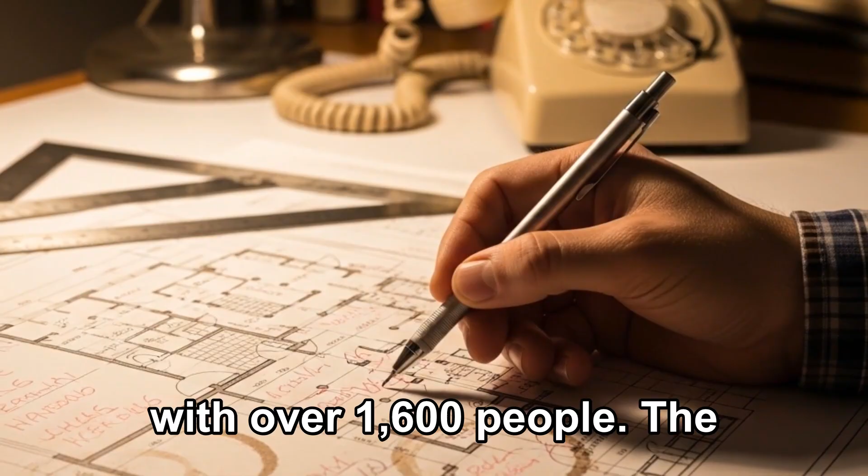It began as a night of pure, unadulterated glamour, a shimmering testament to the economic boom of the early 1980s and the architectural prowess of Kansas City. Imagine the scene. It is July 17, 1981, and the lobby of the brand new Hyatt Regency hotel is filled with over 1,600 people. The air is thick with the scent of expensive perfume and the upbeat rhythm of a swing band. People are dressed in their finest attire for the tea dance, a weekly tradition that had quickly become the hottest ticket in town.

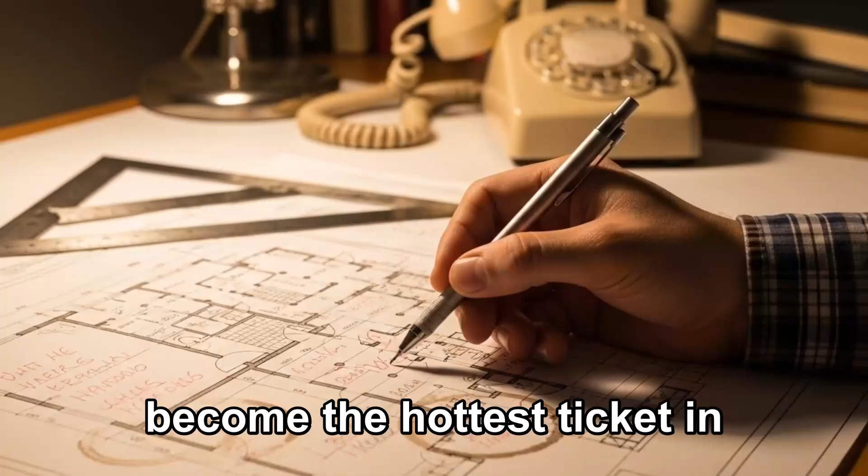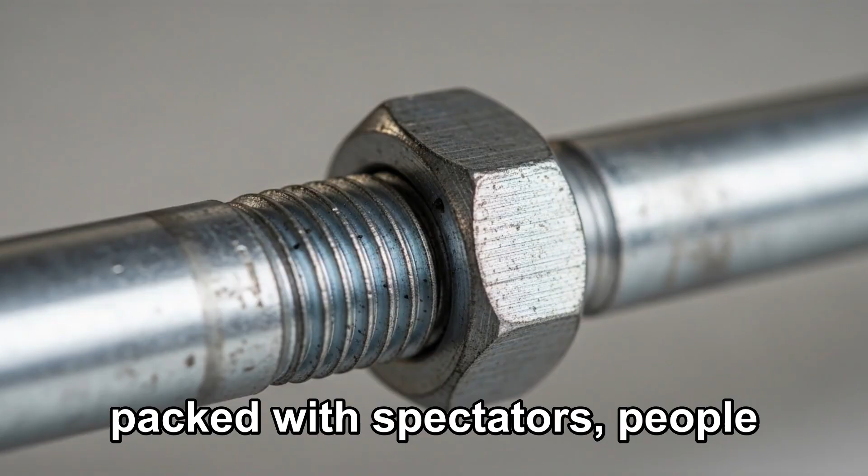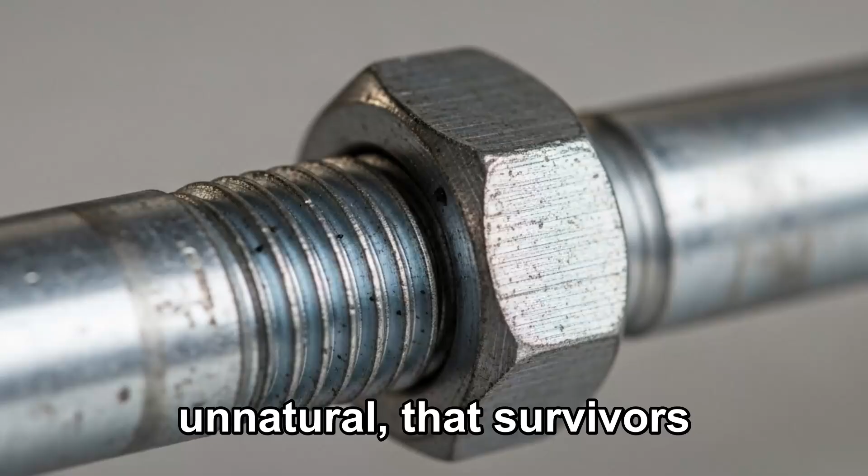Above the crowded floor, three massive, multi-ton walkways made of steel, glass and concrete are suspended from the ceiling like elegant ribbons of modern engineering. They are packed with spectators, people leaning over the railings to wave at friends below, their laughter blending with the music. Then, at exactly 7:05 p.m., the music is severed by a sound so violent, so unnatural, that survivors later described it as a literal explosion or a shotgun blast amplified 1,000 times.

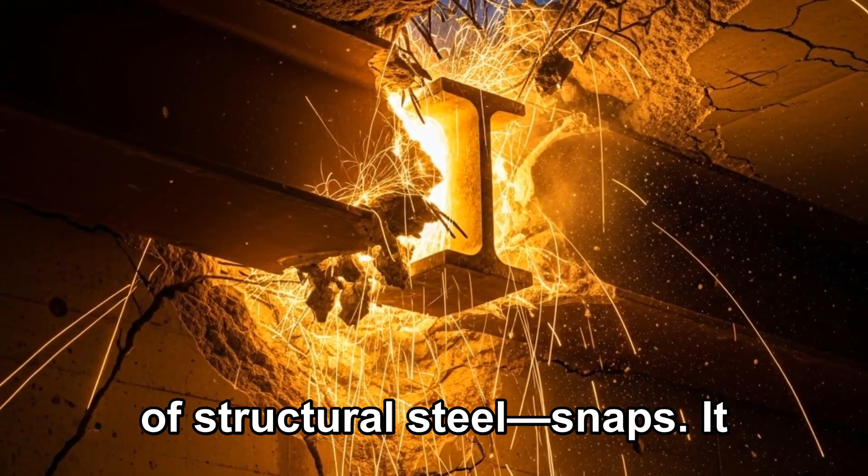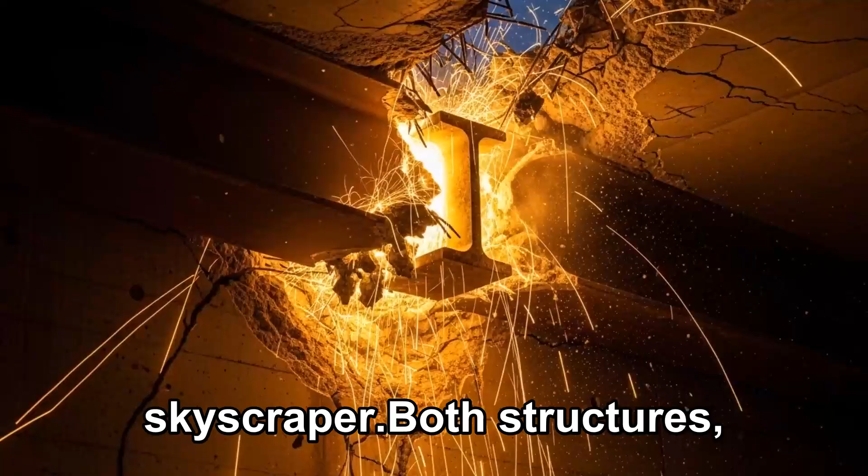In an instant, the fourth-floor walkway, a 64,000-pound behemoth of structural steel, snaps. It doesn't just sag, it shears. It plunges downward, slamming into the second-floor walkway directly beneath it with the force of a falling skyscraper. Both structures, now a combined mass of nearly 130,000 pounds of pulverized concrete and twisted metal, scream through the air and vanish into a cloud of white dust as they flatten the lobby floor. There is a heartbeat of total, suffocating silence before the screaming starts.

In the middle of this video, we are going to reveal a single, 3-minute decision made by a contractor on a busy afternoon that turned these walkways into a death trap. A mistake so deceptively simple that it is still taught in every engineering university on the planet as the ultimate warning of how a lack of communication can kill.

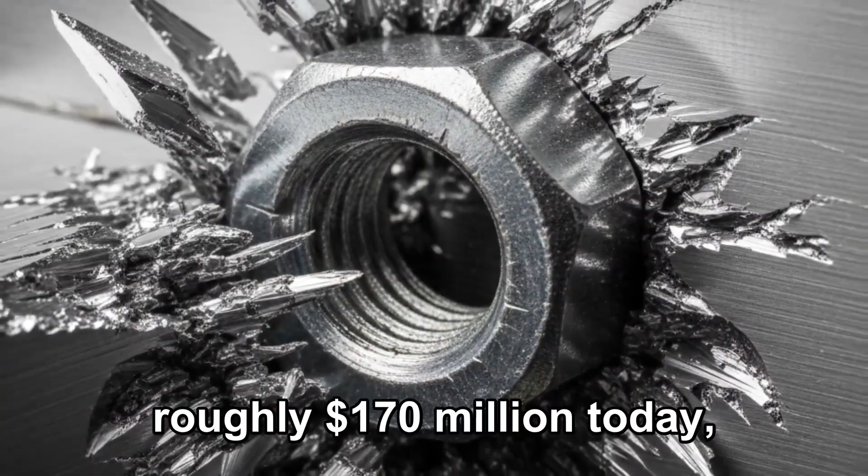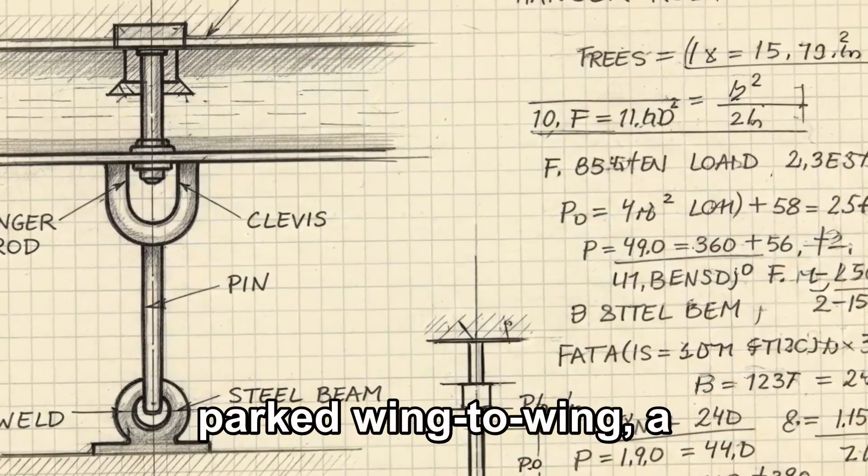The Hyatt Regency was not just another hotel, it was a $50 million crown jewel, a mega project intended to revitalize the urban core of Missouri. To put that into perspective, $50 million in 1981 would be roughly $170 million today, the equivalent of building a luxury stadium or a high-tech hospital wing. At the center of this ambition was the atrium, a vast, sun-drenched cathedral of glass that rose 40 stories into the sky. This wasn't just a room, it was a statement of human dominance over space. The atrium was wide enough to fit several Boeing 747s parked wing to wing, a cavernous void that demanded a unique solution for guest movement.

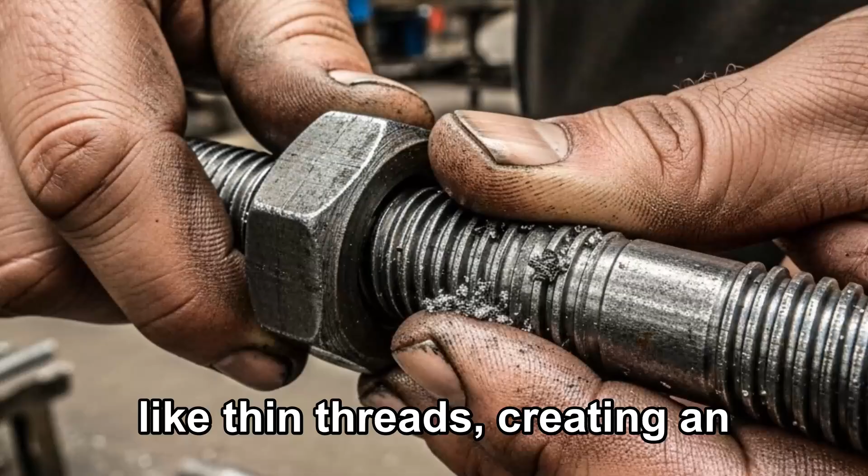The architects designed a series of 3 skywalks, the second, third and fourth floor walkways. These were 120-foot-long spans of architectural brilliance floating in mid-air. To give you a sense of the scale, each walkway was as long as 3 city buses parked end-to-end and weighed as much as 25 full-sized SUVs. They were suspended from the ceiling by a series of 1.25-inch diameter steel hanger rods. To the naked eye, these rods looked like thin threads, creating an illusion of weightlessness that was the talk of the architectural world. It looked impossible, yet it was certified by the most prestigious firms in the country.

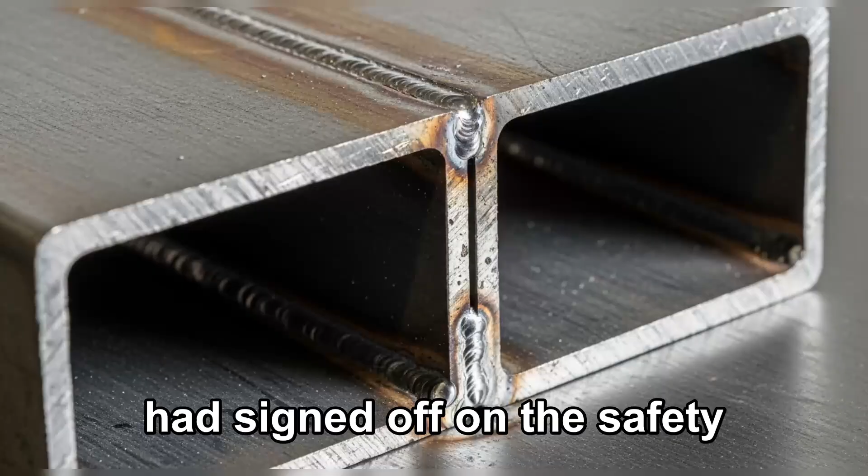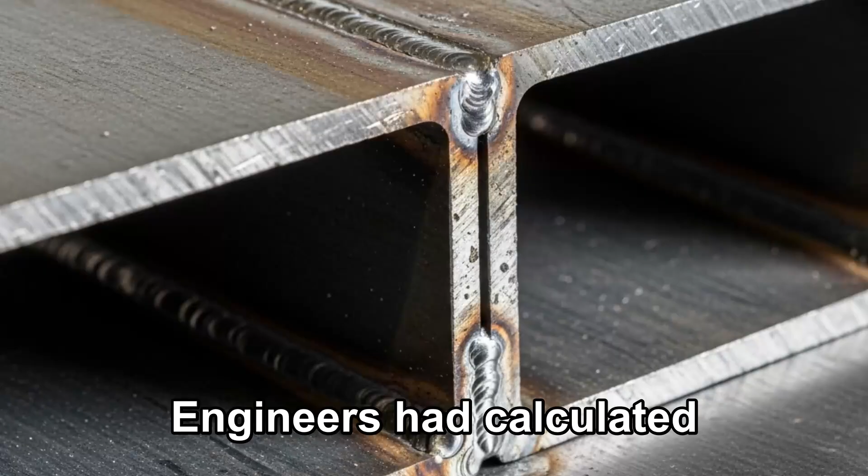Every single bolt, every weld and every structural plate had been inspected. This was a project by Gillum & Associates, a firm known for its rigorous standards and technical precision. The blueprints had been reviewed, the city inspectors had signed off on the safety protocols, and the construction had followed the letter of the law. It was legal, it was modern, and it was supposedly over-engineered. The load-bearing structures were designed to handle not just the dead weight of the concrete, but a massive live load of pedestrians. Engineers had calculated the safety factor to be well within the margins of international building codes. There was no reason to doubt the integrity of the Hyatt. It was the safest place in the city.

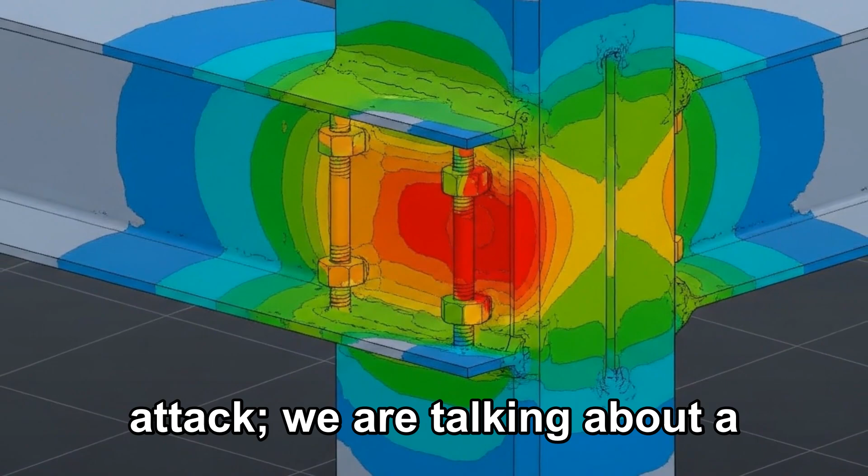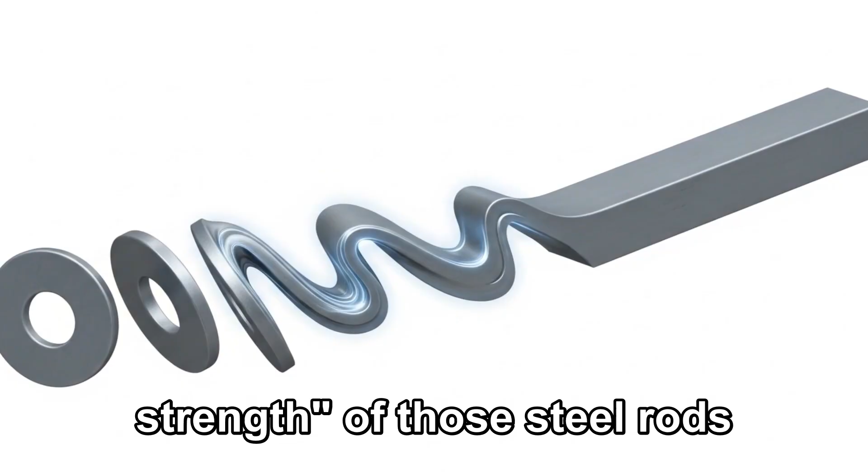Until the very laws of physics were challenged by a design flaw hidden in plain sight. We aren't talking about a natural disaster or a terrorist attack. We are talking about a failure of basic geometry that occurred while everyone was looking at the beautiful pink marble and the soaring glass ceilings. The assumption was that if it looks strong and the experts say it's strong, it must be safe. But on this night, the yield strength of those steel rods was being pushed to a breaking point that no one had actually calculated for the final build. The most terrifying part of this story isn't that the building was weak, it's that it was built exactly how the revised plans said it should be, and those plans were a death sentence signed in ink.

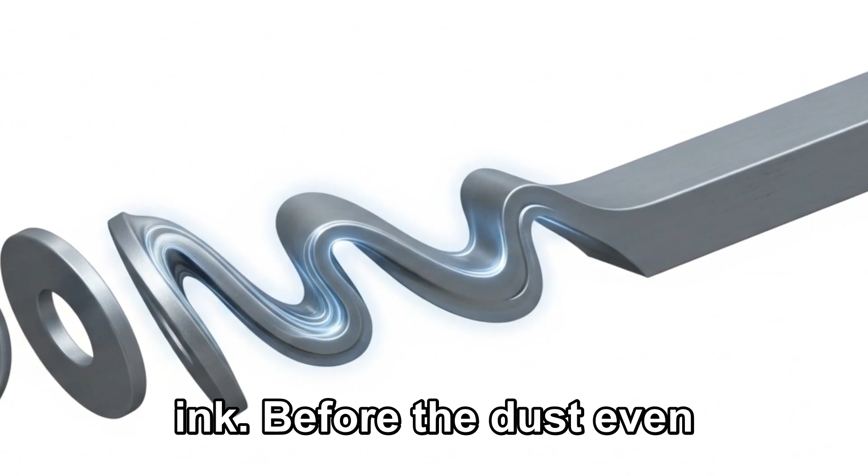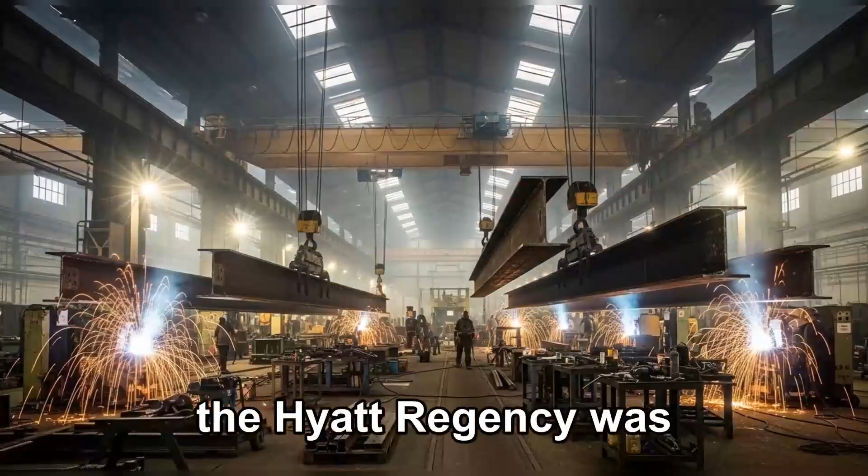Before the dust even settled in that lobby, the question wasn't just how did it fall, but how did we let this happen? To understand why 114 people had to die, we have to look past the velvet curtains and the jazz music, deep into the skeletal structure of the hotel. The catastrophe of the Hyatt Regency was not born on a Friday night in July. It was born in a series of frantic phone calls and skipped calculations 2 years earlier.

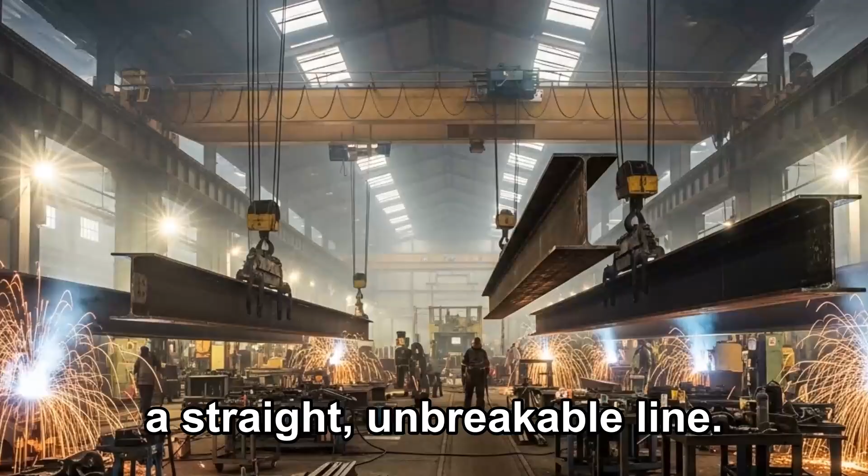At the heart of this failure is a concept engineers call the load path, the specific route that the weight of a structure takes as it travels down to the ground. In a perfect world, this path is a straight, unbreakable line, but at the Hyatt, that path was twisted into a deadly knot.

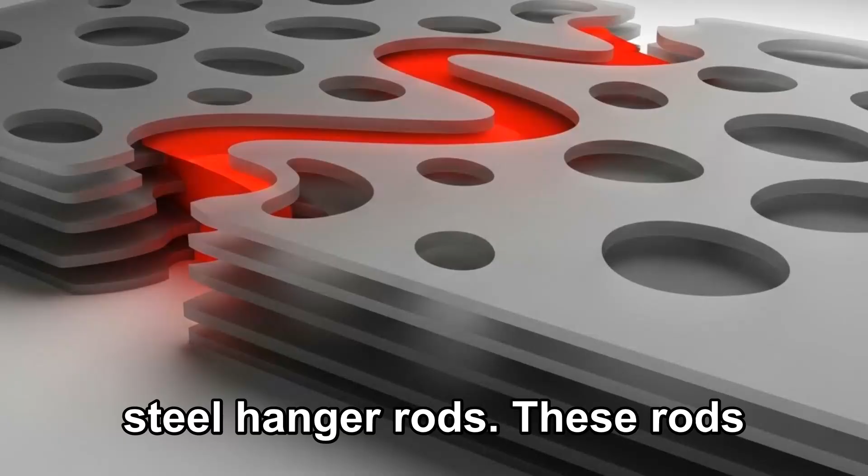The original blueprints, drafted by the esteemed firm Jack D. Gillum and Associates, called for a series of continuous 45-foot-long steel hanger rods. These rods were supposed to run from the heavy structural steel in the ceiling straight through the 4th floor walkway and continue all the way down to support the 2nd floor walkway. In this original configuration, each walkway was independent. The nuts supporting the 4th floor only had to carry the weight of the 4th floor. The nuts supporting the 2nd floor only carried the 2nd floor. It was simple, elegant, and theoretically sound.

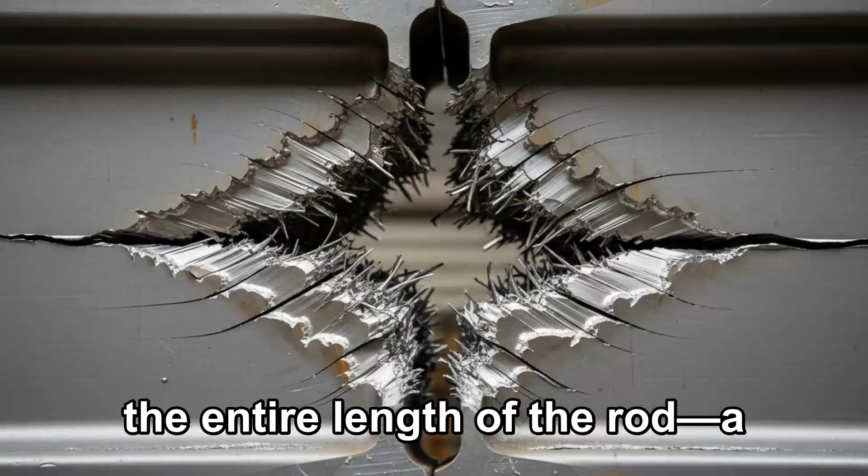However, theory often crashes into the reality of the construction site. The steel fabricator, Havens Steel Company, looked at those 45-foot rods and saw a logistical nightmare. To install them, they would have to thread the entire length of the rod, a process that is not only time-consuming but risks damaging the integrity of the steel. In a fateful, 3-minute decision that was never properly documented or calculated, the design was changed.

Instead of one long rod, they decided to use 2 sets of shorter rods. The first set connected the ceiling to the 4th floor walkway. The second set connected the 4th floor walkway to the 2nd floor walkway. To the untrained eye, it looked identical, but in the world of physics, this change was cataclysmic. By shifting to a double rod system, the engineers unknowingly doubled the load on the connection points of the 4th floor walkway. Now, the nuts and the steel box beams of the 4th floor weren't just holding up their own level, they were acting as a bridge for the entire weight of the 2nd floor hanging below them.

Think of it like this. Imagine 2 people hanging from a rope attached to a ceiling. In the original design, both people are holding onto the rope itself. The rope feels the weight of both, but each person's grip only has to support their own body weight. In the revised Hyatt design, the top person is holding the rope, but the second person is hanging onto the first person's ankles. Now the top person's grip, the connection at the 4th floor, must support the weight of both people.

The load capacity of the connection was stretched to its absolute limit before a single person even stepped onto the glass. The yield strength of the steel, the point at which metal stops acting like a solid and starts behaving like plastic, deforming permanently, was being challenged by the very air it occupied. The technical term for what happened next is shear failure. The box beams supporting the walkways were made by welding 2 C-shaped steel channels together. The hanger rods passed through the middle of these beams. Because of the design change, the nut and washer on the 4th floor were being pulled through the bottom of the steel beam with twice the force they were designed for.

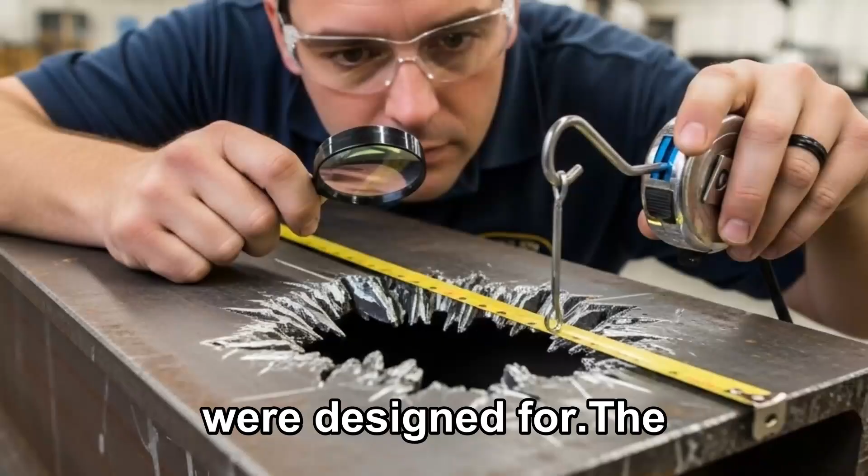The most haunting part is that there were warning signs. During the construction in 1979, a large section of the atrium roof actually collapsed. This should have been a black box moment, a signal to stop and reevaluate every structural calculation in the building. The engineers at Gillum & Associates claimed they did exactly that. They assured the owners that they had reviewed the entire structure, including the walkways. But the math for the double rod change was never actually done. They looked at the sketches, assumed the wind load and seismic load margins were sufficient, and moved on. They ignored the angle of inclination and the sheer torsional stress that the weight of a crowd would eventually apply.

There was no safety factor left. In engineering, you typically want a safety factor of at least 2 or 3, meaning the structure can hold 2 to 3 times its expected maximum load. At the Hyatt, because of that one change, the safety factor had dropped to approximately 0.6. The walkways were failing the moment they were finished. They were simply waiting for the right vibration to trigger the end. They were not just a walkway, they were a 130,000-pound guillotine held up by a prayer and a lack of oversight.

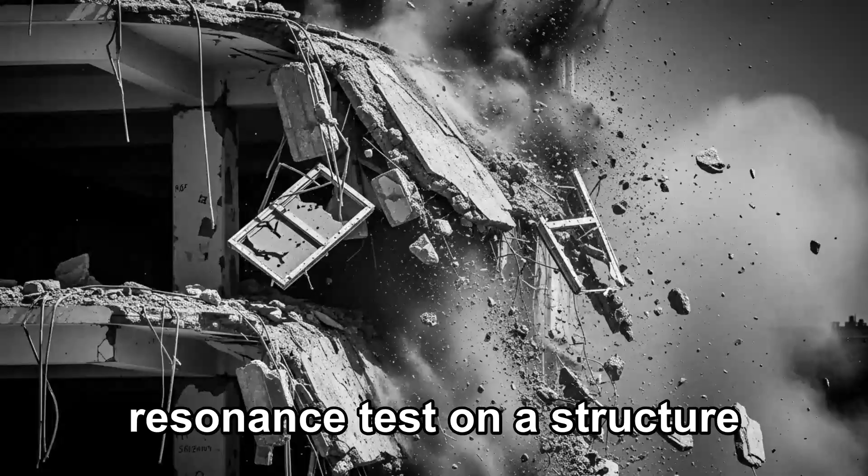As the tea dance began and hundreds of people began to sway in rhythm with the band, they were unknowingly performing a harmonic resonance test on a structure that was already in a state of terminal fatigue. The physics were set, the decisions were final. The point of no return had been passed long before the first bolt snapped. The clock on the wall of the Hyatt Regency lobby froze at 7:05 p.m.

For those standing on the second-floor walkway, the first sign of the end wasn't a visual cue, but a sensation, a sudden, sickening drop as if the very air had lost its buoyancy. Eyewitnesses described a sound that mimicked a massive explosion, followed by the high-pitched pinging of steel bolts snapping like glass beads. In a span of just 7 seconds, the fourth-floor walkway split at its central connection points. The steel box beams didn't just bend, they unraveled. The nuts holding the rods literally punched through the bottom of the beams, creating jagged holes in the metal.

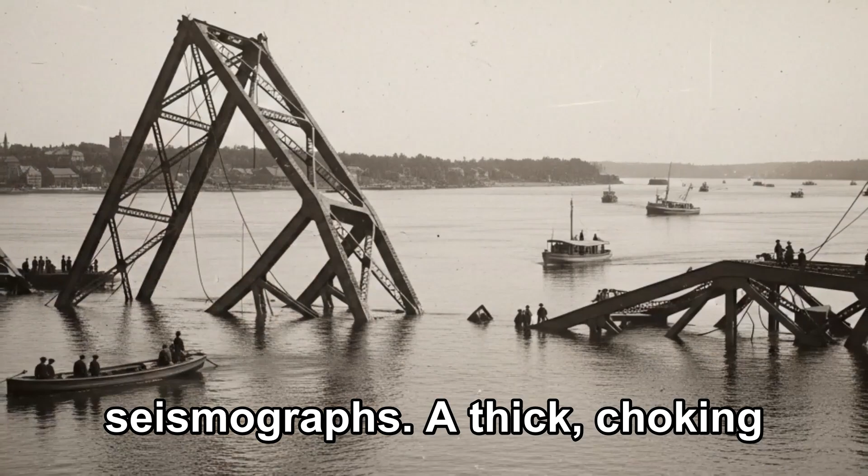As the fourth-floor span began its vertical descent, it acted like a massive piston, slamming into the second-floor walkway directly beneath it. The momentum was unstoppable. Approximately 65 tons of concrete, steel, and human beings accelerated toward the lobby floor. The impact was so violent it registered on local seismographs. A thick, choking cloud of pulverized concrete dust instantly blinded everyone in the atrium, turning the bright, festive tea dance into a dark, suffocating hellscape.

When the dust began to settle, the scene was unrecognizable. Where there had been a soaring architectural marvel, there was now a jagged pile of rubble 20 feet high. The rupture of the hotel's main water lines added a terrifying new dimension to the catastrophe. Millions of gallons of water began to flood the lobby, threatening to drown the survivors who were pinned beneath the massive concrete slabs. Rescuers arrived to find a scene described by many as a war zone. Firefighters and ordinary citizens used car jacks, sledgehammers, and even their bare hands to claw at the debris.

One of the most haunting stories is that of Mark Williams, a young man who spent hours trapped in the freezing water, holding the hand of a stranger who eventually went cold. Or the story of the band who were playing the final notes of a swing classic when the sky fell on them. The human cost was staggering. 114 people were killed instantly or died of their injuries, and 216 others were left with life-altering scars, both physical and psychological. This was not just a list of statistics, these were families, local leaders and children who had come for a night of joy and found themselves in the middle of the deadliest structural collapse in United States history until the fall of the Twin Towers.

The immediate response from authorities was a mix of shock and clinical precision. Within hours, the National Bureau of Standards (NBS) had cordoned off the site. They didn't just want to clean up, they wanted to find the black box of this building. Lead investigator Edward Pfrang began the painstaking process of analyzing the wreckage. The investigators discovered something chilling. The walkways were so poorly designed that they were barely supporting their own weight. The data logs showed that on the night of the collapse, the walkways were carrying only about 10% of the maximum live load they were supposed to handle. This meant the failure wasn't caused by the crowd being too heavy or people dancing too hard. It was a failure that was destined to happen eventually, even if the building was empty.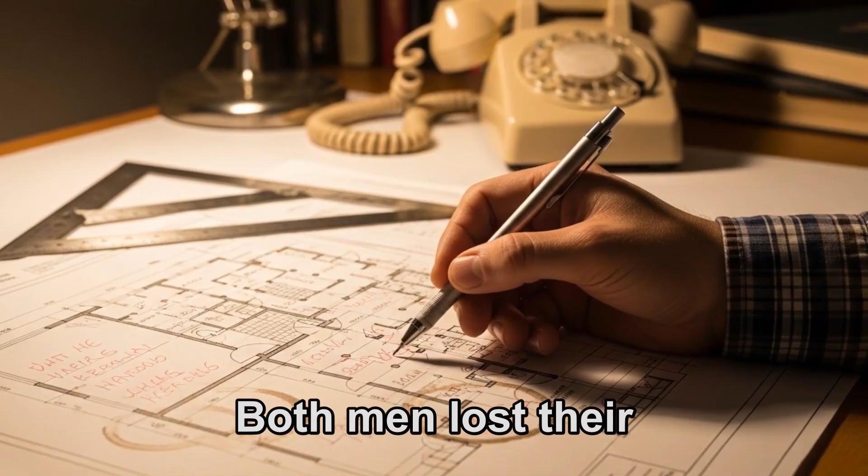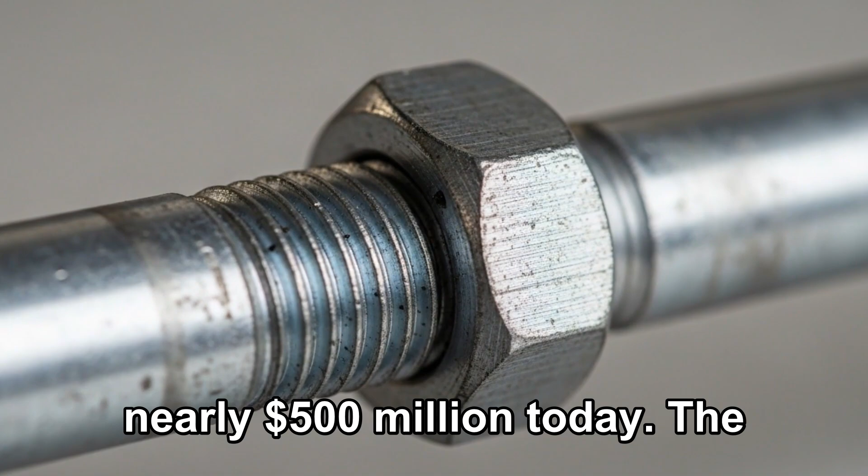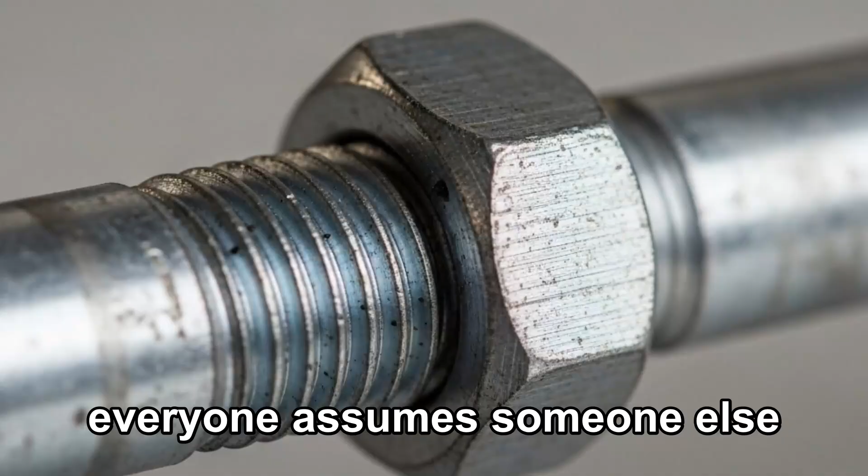It was professional negligence. In 1985, the Missouri Board of Architects, Professional Engineers and Land Surveyors took the unprecedented step of convicting Gillum and Duncan of gross negligence, incompetence and misconduct. Both men lost their engineering licenses in multiple states. While no one served jail time, the professional fallout was total. The engineering firm went bankrupt under the weight of $140 million in legal settlements, the equivalent of nearly $500 million today. The Hyatt Regency collapse became a permanent scar on the face of American engineering, a case study in how the chain of command can fail when everyone assumes someone else is doing the math. The investigation concluded that the catastrophe was 100% preventable, a fact that only deepened the tragedy for the families who were left to pick up the pieces of their broken lives, while the industry began a radical, soul-searching transformation.

The shockwaves of Kansas City didn't stop at the hotel doors. They ripped through the very foundation of the engineering profession, triggering a total overhaul of the standard of care. Before July 17, 1981, the world of construction operated in a dangerous gray area of responsibility shifting. Architects assumed the engineers had checked every bolt, engineers assumed the fabricators understood the structural intent, and fabricators assumed the shop drawings were bulletproof simply because they hadn't been rejected. The Hyatt collapse shattered this illusion of shared safety. In the immediate aftermath, the American Society of Civil Engineers, ASCE, took a revolutionary and controversial stance. The Structural Engineer of Record, SER, now bears the absolute, non-delegable responsibility for the structural integrity of every single component in a building.

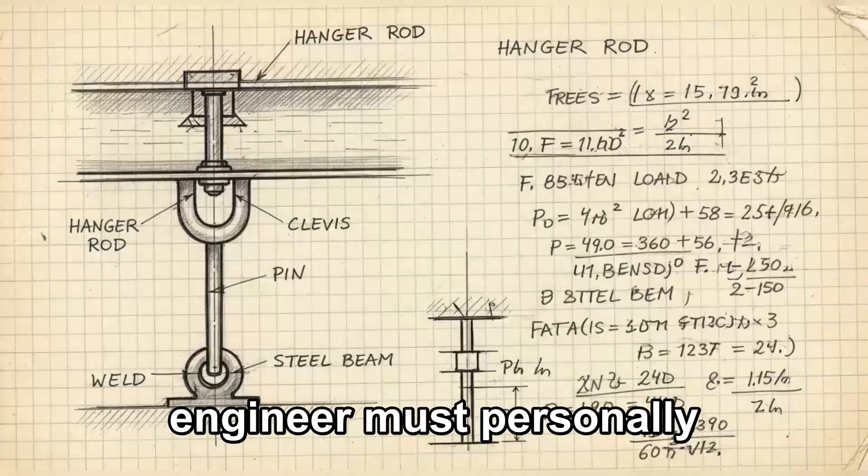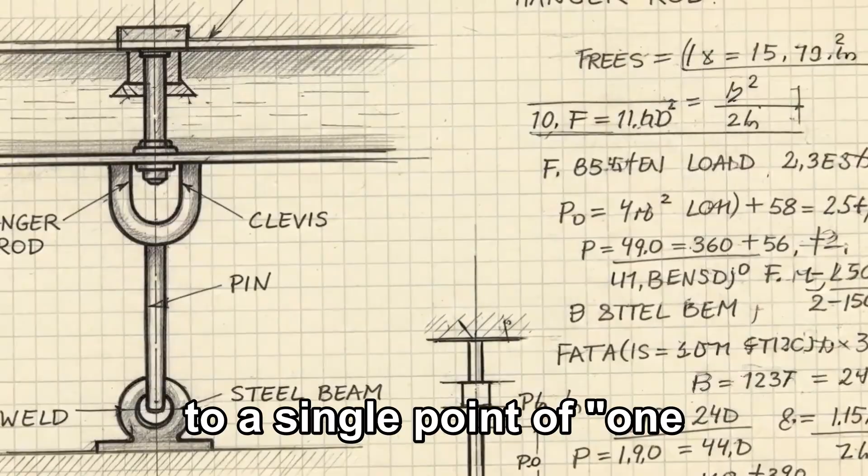This means that even if a contractor suggests a minor change to a hanger rod or a weld on a busy Tuesday afternoon, the lead engineer must personally verify the math and sign off on it with their professional license on the line. To put this in perspective, this change moved the weight of responsibility from a diffuse cloud of everybody to a single point of one person. It is the difference between a team playing a sport without a captain and a ship where the captain is legally required to go down with the vessel if it sinks.

The financial echo of the tragedy was just as deafening as the collapse itself. The $140 million in legal settlements, which would be nearly $500 million in today's currency, sent a chilling message to every firm in the industry. Negligence is infinitely more expensive than perfection. Imagine the cost of building 10 state-of-the-art high schools or purchasing a fleet of 20 private luxury jets. That is the price tag of a single uncalculated design change.

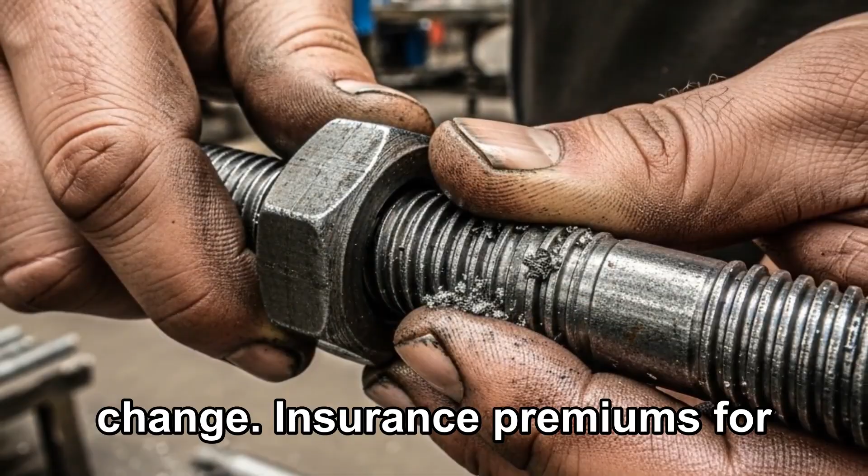Insurance premiums for engineering firms skyrocketed by as much as 300% overnight. This wasn't just a tax, it was a safety premium that forced every major firm to implement a 2-tier or 3-tier review process. Today, a design like the Hyatt Skywalks would be subjected to peer review laws, requiring a second, completely independent firm to audit the plans before a single ounce of concrete is poured. It is like having two different pilots check the fuel levels of a plane independently. The chance of both missing a critical error is statistically near zero.

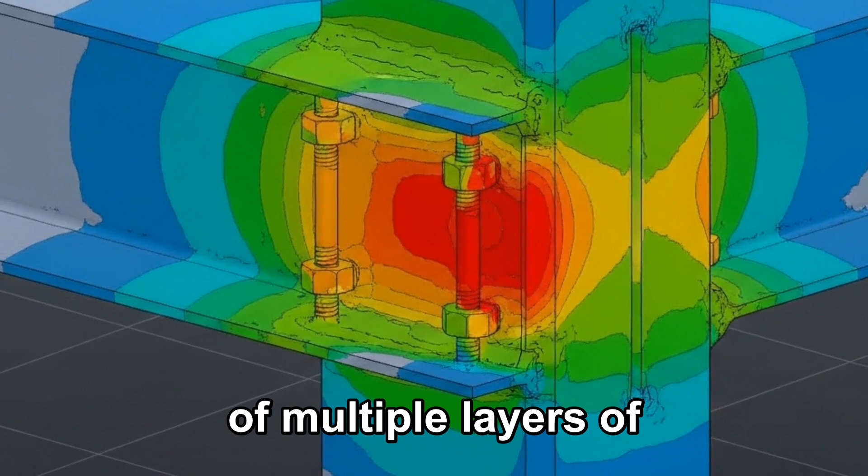But why did it take 114 lives to learn a lesson that seems so fundamental? If we look at the Swiss cheese model of accidents, we see that the Hyatt collapse was the result of multiple layers of failure lining up perfectly. The first hole was the initial design's difficulty to build. The second was the fabricator's suggested change. The third was the lack of a formal calculation for that change. And the final hole was the failure to notice the actual deformation of the beams during the hotel's first year of operation.

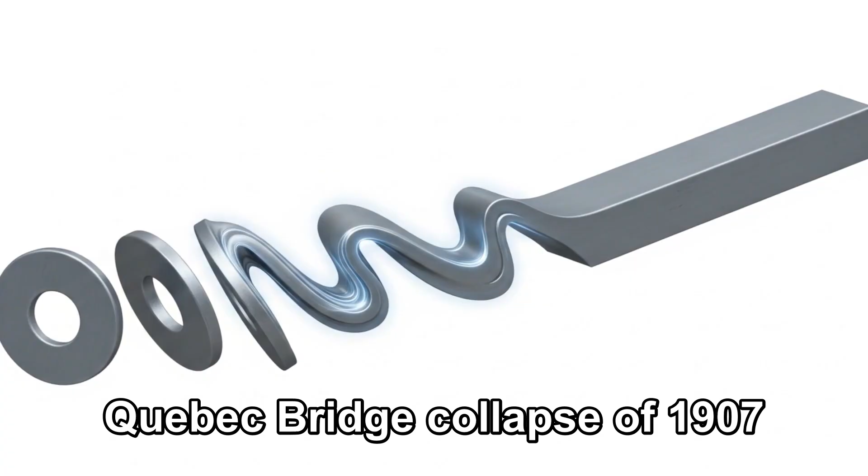In history, the Hyatt is the modern successor to the Quebec Bridge collapse of 1907 and the Tay Bridge disaster of 1879. In every instance, the yield strength and load capacity of the materials were sacrificed at the altar of the schedule or the ego. The Hyatt is now a mandatory Day 1 case study for every engineering student in the United States. They don't just study the shear failure of the steel, they study the ethics of the phone call where the change was approved. They are taught that behind every decimal point in a calculation sits a human being whose life depends on that math being right.

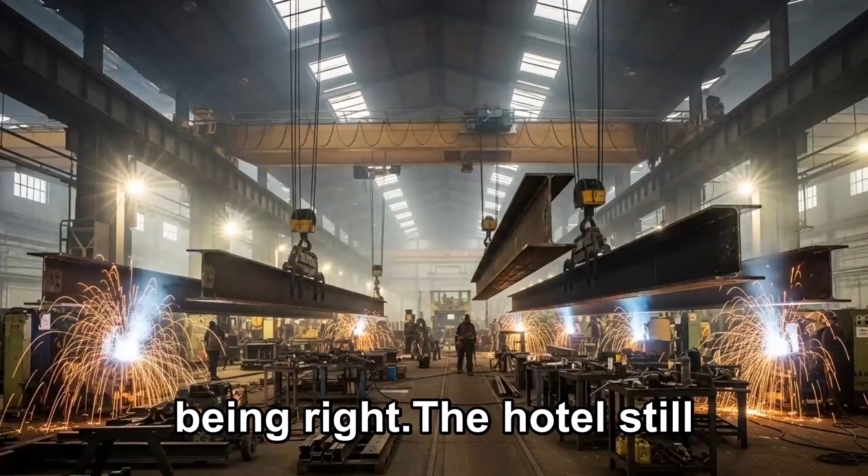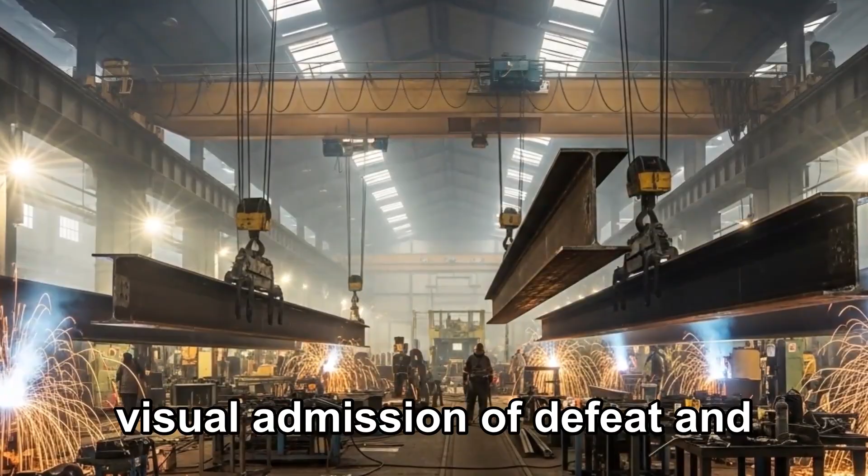The hotel still stands today, now known as the Sheraton Kansas City Hotel at Crown Center, but it is a ghost of its former architectural ambition. The atrium was completely remodeled and the floating skywalks were never rebuilt. Instead, the remaining walkways are supported by massive grounded columns, a visual admission of defeat and a permanent reminder that, in this instance, our desire for beauty outpaced our commitment to safety. It took 34 years for a memorial to be built, a quiet circle of stone and stainless steel that finally gave the families a place to mourn.

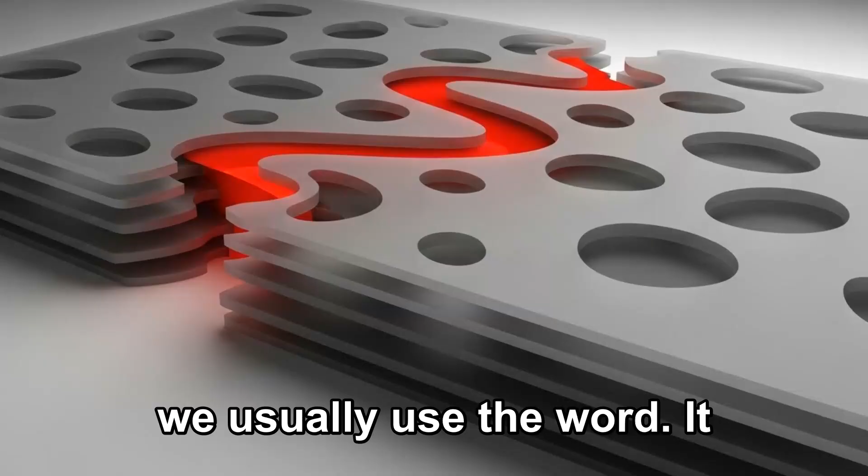It serves as a reminder that the T-Dance tragedy wasn't an accident in the way we usually use the word. It was a failure of communication, a failure of oversight, and a failure of the sacred contract between the builder and the public. When you walk through a modern airport, a stadium, or a shopping mall, you are placing your life in the hands of a stranger's calculations. The Hyatt Regency collapse ensured that those hands are now held to the highest standard of accountability in human history.